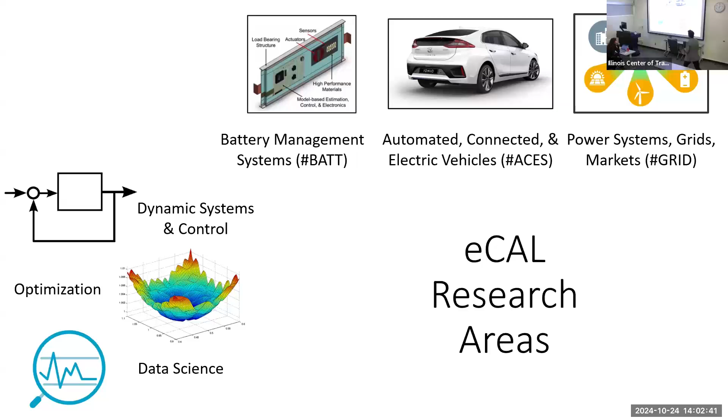I am also faculty director of PATH, which is something like a research center within UC Berkeley's Institute of Transportation Studies, analogous to ICT here. PATH, California Partners for Advanced Transportation Technology - our mission is to realize safe, equitable, efficient, carbon-neutral transportation systems for all through research and development of advanced ideas and technologies.

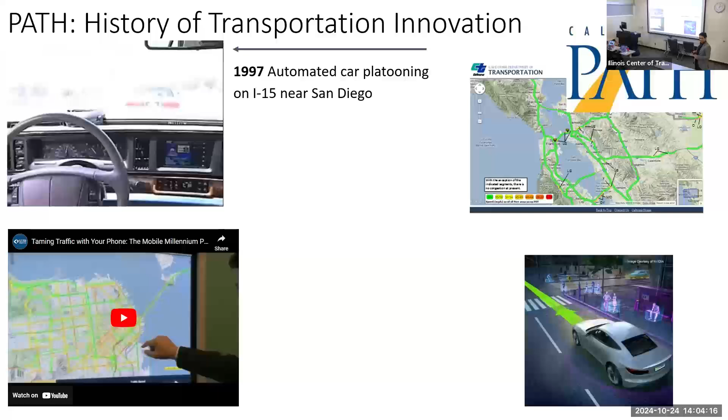To give you a clearer picture, let me say something about our history, our present, and our future. It has quite a history - some of you may be aware, some may not. Let me start with the year 1997. PATH plays an important role in automated vehicles. We were the first to deploy automated vehicles on public roads with this platooning that you see here on I-15 highway just north of San Diego. I should emphasize, the point of this wasn't that the vehicles were intelligent and automated - it was actually the highway. We can have more discussion on that history.

Another piece of history is PATH was the first to create infrastructure-based traffic monitoring with a system called Performance Measurement System, which collects real-time data from 40,000 road sensors. The way we used to monitor traffic was like this: there are many younger people in the audience, but the way we used to monitor traffic is we point a camera at the highway and say 'look, traffic.' The problem was, if we didn't point a camera at the highway, we didn't know what traffic was in that segment, right? Then the next transportation innovation was the helicopter, because then we put a camera in a helicopter, and that helicopter moved around the cities, and you could see where traffic was.

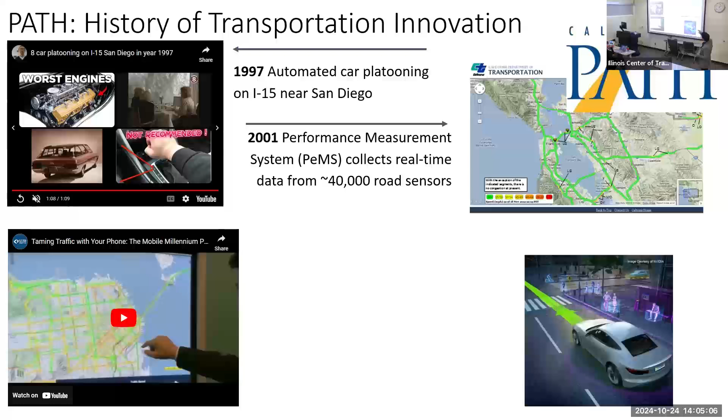So this was infrastructure-based sensing, and it created this online platform where you could get real-time traffic measurement all across California. And then there's Mobile Millennium. The way that most of you probably understand traffic today is with your smartphone, like Google Maps, Apple Maps.

That was actually invented in Path before Google Maps and Apple Maps, with this project called Mobile Millennium, started by Professor Alex Bayen, shown there, where he eventually ended up hiring 100 students to just drive vehicles along the highway. The idea was using cell phones as sensors with the biggest cell phone company at the time—not Apple, there was no iPhone, not Samsung—it was Nokia.

You remember playing Snake? Okay, yeah. You guys look young, but maybe you're not so young if you played Snake on Nokia phones.

After this was done, a year later, Apple hired basically the whole team, and Apple Maps traffic is like Path 2.0 software. Of course, it's evolved since then.

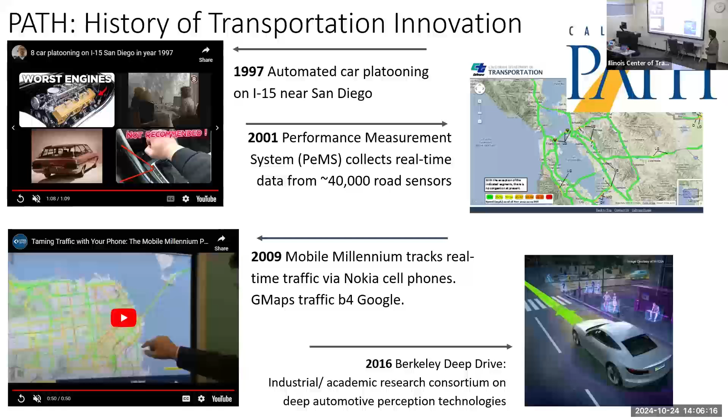More recently, we started this industry consortium—it's been 8 years now—working on computer vision and AI technologies for automated vehicles. Today, here's some of our featured projects. I'll talk about NEXTCAR in this lecture.

MegaVanderTest—this was Alex Bayen and others. Dan Work was a big part of this, a former UIUC faculty member. This was the largest traffic experiment in history to use connected vehicles to suppress stop-and-go waves.

We have a connected vehicle test bed we often work with, and we work with the California Department of Motor Vehicles.

Anyone been to San Francisco and seen these robocars drive around? Yeah? Did you take a ride? You didn't take a ride? Waymo, you tried? Okay, so you tried?

We actually are the only research institute that has a contract to do analysis with the Department of Motor Vehicles, to assess safety and various other things related to rural communities, for freight, and also for disabled and vulnerable populations.

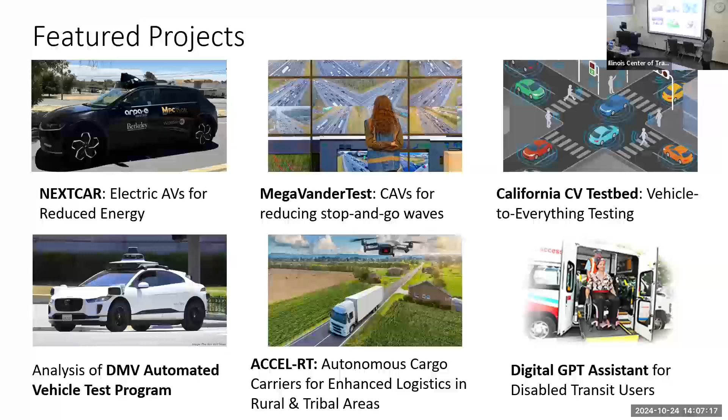When I was driving here, I was listening to a podcast about the scientists involved in the Manhattan Project, talking about trying to figure out the existence of neutrons, because the atomic weight of atoms was more than just the number of protons. Anyways, that's TRL1, right?

And TRL9 is like the iPhone. So Path's role—I'm curious to hear if ICT sees it similarly—faculty and their research labs are basically at TRL 1, 2, 3. When they mature an idea and want to take it to the next stage, that's where you get to TRL 4, 5, 6. Sometimes we call this the valley of death. If it survives and matures, eventually industry picks it up for full deployment and commercialization.

So I see Path's role is to pick up and help mature university research from faculty to the next stages, towards demonstration and deployment. Important to that is partnerships—the P of Path—with government, industry, startups, and academia, because you need that to create these demonstrations and deployments.

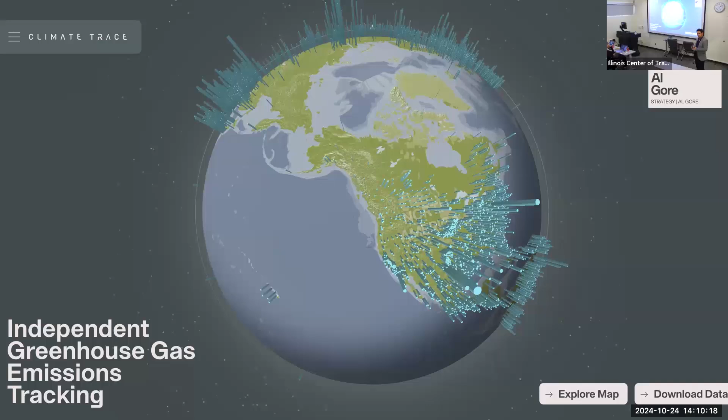Governments would just claim what their carbon emissions were. So finally, he came across this startup that came out of our lab, which got funding from Google to use satellite imagery and AI to basically estimate where carbon emissions come from. And he kind of really helped supercharge it.

So you can get something like this here. What I did is for the world, there's categories. You can break it down in visualizations of carbon emissions in different sectors, like transportation. Here I picked two regions, North America and Asia, sector transportation, and you can see in each of these regions what facilities have the most amount of carbon emissions. So you can check that out if you're ever curious about carbon emissions.

I mentioned these, you know, Waymo and the like in San Francisco. So what happens is these companies are required when they get a testing permit in California to submit crash reports. And so PATH researchers and PhD students do analysis on the safety of these AVs.

So here's a question: are these AVs as safe as human-driven vehicles? How many think those AVs in San Francisco are as safe as human-driven vehicles? Yeah, you have your hand raised. How many think maybe human-driven vehicles are safer? Yeah, okay. Well, anyways, I'm not going to give you a clean answer to this because there really isn't a clean answer. But if you want to know more, you can check out this TRB paper.

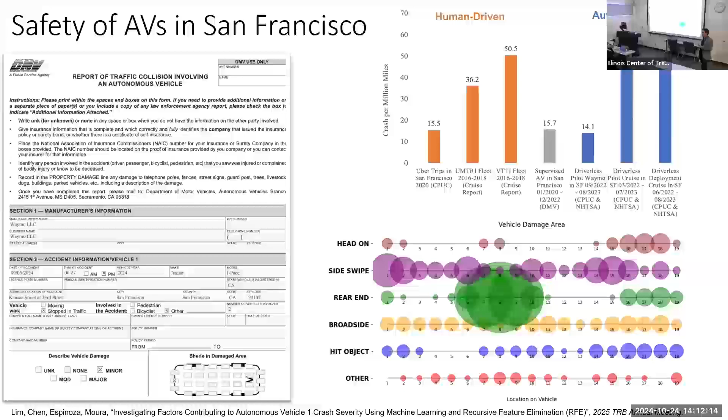It basically does an assessment of these AV vehicles in different stages versus Uber trips driven by humans, of course, also in San Francisco. So we do this sort of analysis, and this visualization shows where vehicles are damaged. Actually, AVs disproportionately compared to human-driven vehicles tend to have more rear-end collisions. So the nature, the distribution of types of crashes you have with AVs are different. You can ask me questions to dive more.

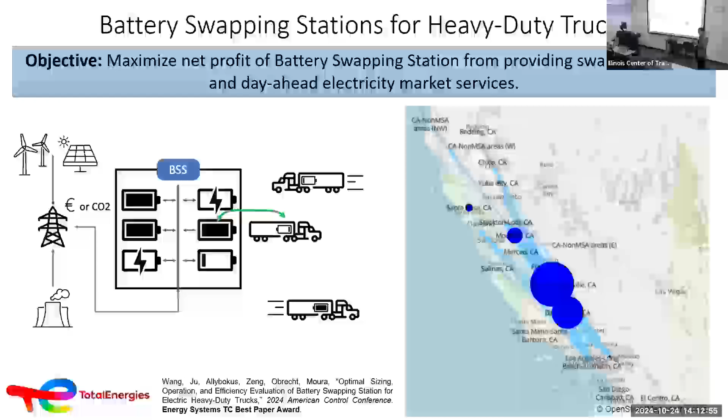Something else we worked on is battery swapping. We want to electrify heavy-duty freight transit, but doing it with these mega chargers might not be the best idea. So here we looked at the idea of swapping batteries in and out for trucks. Meanwhile, these battery swapping stations, when they're waiting for a truck to come take a charged battery, basically serve as battery storage systems providing grid services. So this is an example of when you electrify mobility, the energy and transportation infrastructure are definitively coupled. This facility has two products: e-mobility and power system services.

This is also very connected with the work of Professor Ria Cantu and others, where there was this California project with different UC campuses where we asked this question: in 2035, the plan is to have 100% new vehicle sales in California be zero emission vehicles, largely EVs. But what happens when there's a disaster? How do we evacuate certain areas? Much of this is about vehicle routing problems in cases where transportation links or power lines are down, and how do you robustly evacuate people efficiently, then plan how you might place mobile storage, mobile charging units.

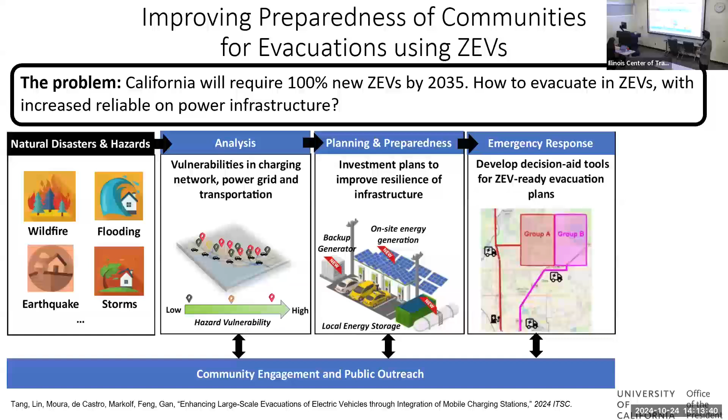Okay, last thing I'll mention is this coupling. We've also done some game theoretic analysis of these bipartite graphs of transportation and power networks. When you electrify, they couple, and we study equilibria of these types of systems. You can ask me questions about that, but I won't say any more about those projects. I want to now dive into the meat of the talk.

So why electrified transportation? Many of you are probably convinced, but I'm going to give you my perspective. If there's one number to give you, here's quiz question number one: how many tons of greenhouse gases are emitted per year on Earth? The answer is 51 billion. So when we think about taking different actions in an effort to bring this to net zero, how big are these slices?

So here we're in this Institute of Transportation. Worldwide, transportation is like 16%. Many of you are doing materials research related to transportation infrastructure. Look at this.

6% from cement, right? Huge opportunity to decarbonize if we can focus on decarbonizing cement, iron, and steel. I won't say any more about that. I'm just saying there's a huge opportunity there.

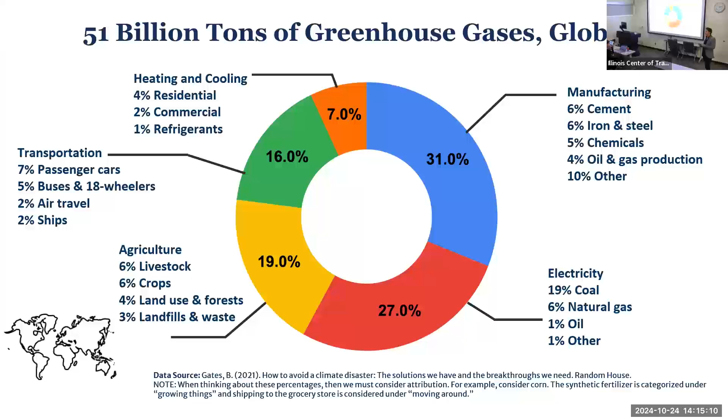Now, this is worldwide, but it's not necessarily representative of more developed economies. This is the entire world. Let me focus on California, since I'm here. California is an example of, like, if it were its own country, it'd be the 4th or 5th largest economy in the world. Anyways, California emits 0.42 billion tons of greenhouse gases. Almost 1% of the whole world's greenhouse gases are because of these Californians.

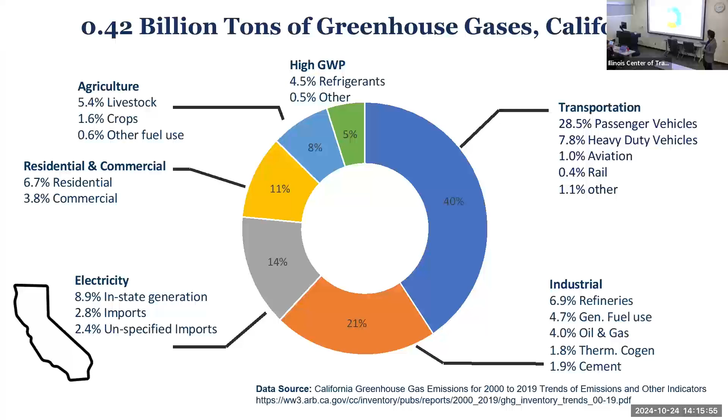Damn Californians. So anyways, but the nature of California's economy, and it's very similar in developed economies, transportation is by far the biggest sector, 40%. So a lot of policies in California are very focused on decarbonizing transportation because that's a huge chunk, right? And meanwhile, once you electrify transportation, you also have to decarbonize electricity, and that's also happening.

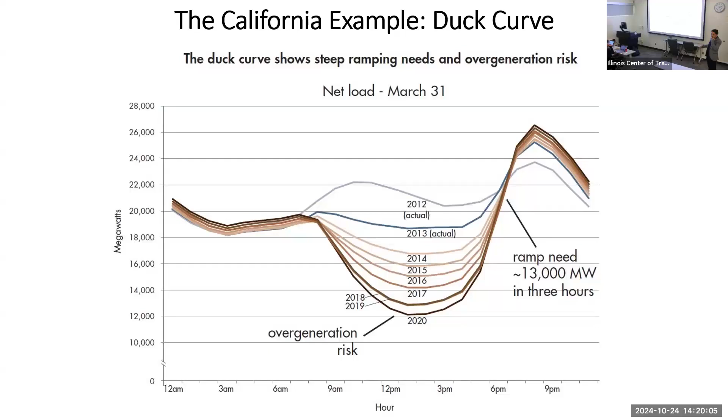Now, that was in 2012, projecting to 2020. The year is 2024 right now, right? So what happened? Here's what happened.

So in spring, this is actual data from California. You got total demand with this light blue curve, and then this dark blue or purplish is net demand. So you can see the duck curve happened, it's kind of this big valley. And the ramping here, I picked a date in April this year, 16,000 megawatts in 3 hours.

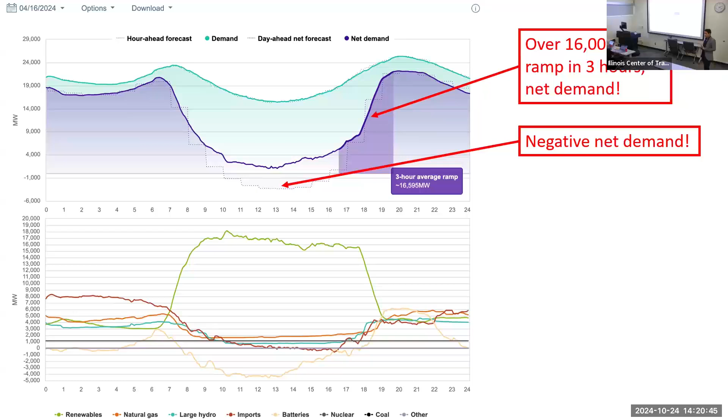It's happening, this rapid ramping. In fact, there's even negative demand, which means, at least in California, in spring especially, we're generating more electricity from renewables, particularly, than we can even consume. We're over-generating, okay?

And that's demonstrated because this green curve, it's a little hard to read, but this is renewable generation. You can see it looks like someone took a knife and sliced the top of it, right? Normally you would have this type of shape, because we have to actually reduce output from solar because we have nowhere to put it, right? We're trying to export it. Meanwhile, California is deploying all these batteries, and that's what this light yellow curve is, and they're trying to charge them up in the middle of the day, okay?

By the way, I haven't been talking about transportation in the past couple slides. So you can kind of see, okay, now there's this opportunity where maybe we can take all this excess supply and use it for other purposes, including transportation.

There's this other problem, right? If we want to electrify vehicles, people tend to arrive home in the evening and plug in and charge, which actually makes this ramping problem worse. It'll increase demand and then it just worsens the problem.

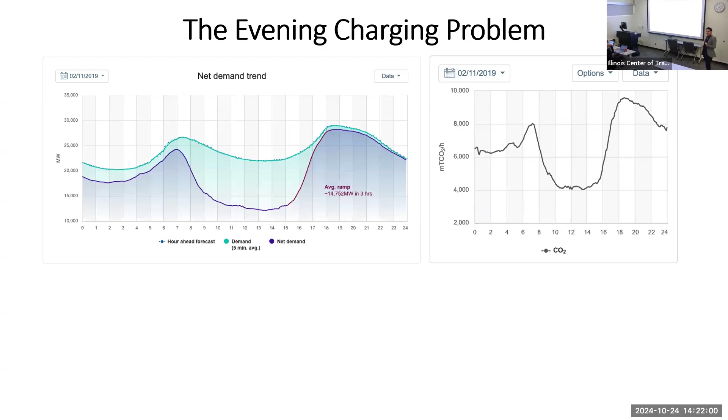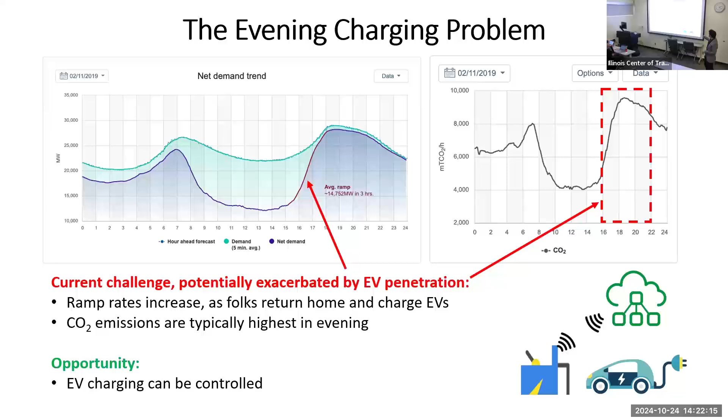Also, if it's charging overnight, this is the time of day where emissions are the worst. So if you come to California and rent a car, please don't charge in the evening, because that's when emissions are the worst. If you have a chance, try to do it in the middle of the day. So obviously there's an opportunity where can we control EV charging, shift it to these times away, so it doesn't exacerbate this ramping problem, and minimize the marginal carbon emissions.

Here's actually what I want people to do. And by the way, this is kind of California specific. I want you to leave home with 30%.

Did anyone leave their home this morning with 30% charge in their phone? No? Yeah? Yes, Laura, thank you. Yeah, you can charge at your desk, right? Yeah, okay good, you can live in California.

So that's perfect, because that's when carbon emissions are least, and if you have an opportunity to charge in the middle of the day, you can return home with 90%. You don't have to worry about charging in the middle of the night. And by the way, that addresses inequities where people might not be able to charge at home if they don't have a place to park.

So okay, now that's all of the context which I want to use to describe this project, SlrpEV, about improving public and workplace charging, because we don't have sufficient public and workplace charging. So the goal here is to create the next generation of workplace or public EV charging that achieves these goals. What I want to emphasize is this is a deployment where we built an EV charging station, and there's many smart EV charging stations that optimize power delivery.

So why is this different? This is different because we're not just optimizing the charging schedule, the power, but we're optimizing the price that we offer people, and we show people a menu of prices with different options. And so really, this is about putting the human in the loop with machine learning to understand their behavior, as you'll see. So I like to think about this as a cyber-physical human system.

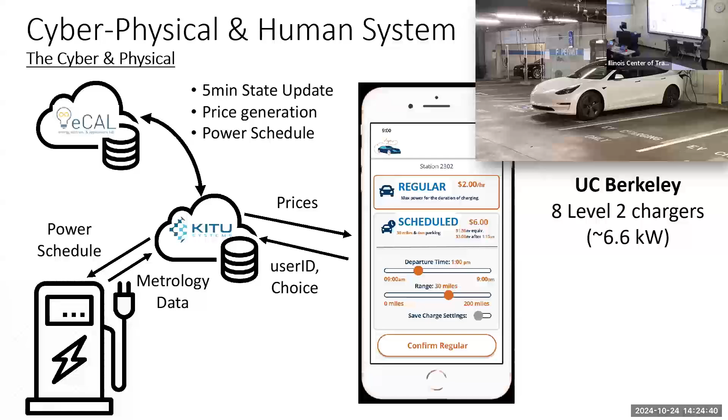So you pull up, you scan a QR code, and then there's an app or a web app. You log in, and then you get prices. Don't worry about the prices and options yet, I'll explain that. You consider these options, and then you pick your choice. That choice goes in, and then there's some optimization happening, and it sends a power schedule back down to the chargers. Then there's the so-called metrology data, every 5 minutes we get an update from the chargers of how much power it's delivering, whether someone's connected, yada yada. So that's the cyber part.

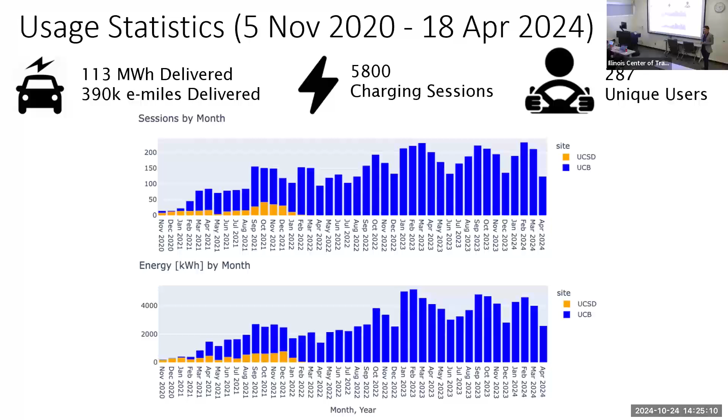Now the human part I'll describe in a moment, but first, some usage statistics over this period: energy, charging sessions, unique users. Here I'm showing the energy and sessions by month. Actually, what I want to emphasize is the most important metric, I think, is the number of unique users, because then we get unique behaviors of how people arrive and depart, the energy they need, and the choices they make. So I think that's the most valuable metric, getting a lot of different unique users and different behaviors. And there's seasonality that we find.

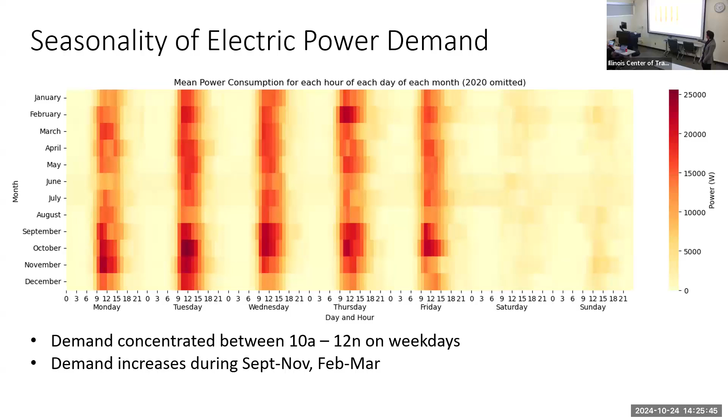So people use this as commuters, basically. Here's a nice visualization where you have day and hour on the x-axis. Monday, Tuesday, Wednesday, Saturday, Sunday, there isn't much usage. And then we have month, so you can see the seasonality. Basically you see people use this as workplace charging - Monday, Tuesday, Wednesday, Thursday, Friday. And if you look a little closely, it's a little lighter in summer because there's less activity on campus, and it's kind of heavier at the beginning of our terms.

So now the human part, which is really the key unique thing about this research. It's really about providing choices, discrete choices - there's discrete choice theory underneath this. So let me describe the two choices we offer our users. The first is called regular, and this is your normal charging experience with a phone or a laptop. You plug in and it charges immediately at full power until you top off the battery or you unplug. In regular, we consider it not controllable, like we can't change the power delivery.

The more interesting one is scheduled. With scheduled, we ask them what time do you plan to depart and how much added range you need, how much energy do you need. This provides constraints in an optimization where we know, okay, they plugged in, we need to deliver to them this much energy by this deadline, but the trajectory of the power delivery is otherwise flexible. And so this is now controllable. So the research question is, if I want to shift load, how much do I discount scheduled to acquire this flexibility?

By the way, this is not strange or different, because when you shop on Amazon, you experience this. You get shipping options, right? There's next day shipping at normal price, and then there's like the Amazon delivery day, where it's discounted - you give up some quality of service, if you don't mind, and you get a cheaper shipping price, but they're optimizing logistics on their back end. So we're like the Amazon of EV charging here.

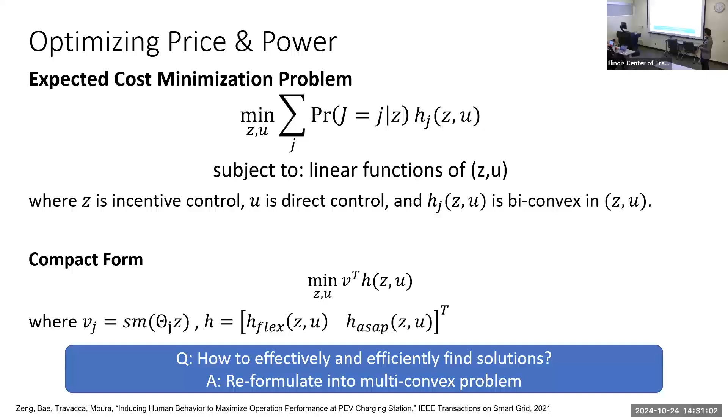So you can refer to this paper to see some of the mathematical details. So, in the end, here's what you get. We optimize price, and here's the result.

So basically, we just want to avoid EV charging here. Meanwhile, if people arrive early in the morning, if we can delay their charging just a little bit, maybe we can dump them into the lowest cost period. You can start to see what's going on.

Yeah? So it's sort of like an aggressive American restaurant where the waiter says, get you fed, get your check, get paid, get you out of there. Right? So that's what we want with EV charging stations, usually to increase utilization, because when we pump out kilowatt hours, then we can make revenue to recover the capital cost.

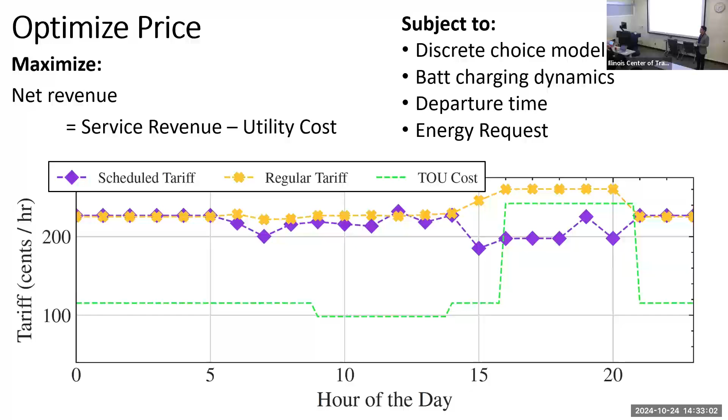That's kind of the intuition of what all the mathematics and learning is producing. And in the end, we get this: comparing to a baseline of $1.50 per hour versus optimizing the price and the power. This is only optimizing the power, with a fixed price to users. We can actually increase the net revenue by almost 50%, which is a combination of reducing the operating costs.

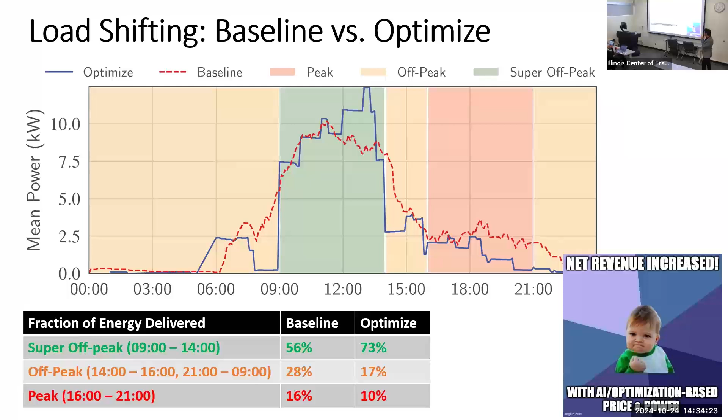But we also learn from data on user behavior that we can charge a slightly higher price and people will still use the service. So we're also learning what people's threshold is for paying for charging. Here you can see the different price periods: we want to charge in the super off-peak and avoid the peak. Here's the mean power over a period at SlrpEV - just before this green period, when it's optimized, we basically bring power almost to zero, because we're delaying those users and shifting them into this period. This happens all dynamically, by learning user behavior and optimizing with respect to the utility tariffs. This was me - I thought this actually worked in practice, which shocked me. I thought people would not be sensitive to small variations in price, but they actually were. So that's pretty cool.

All right, let me move on to NEXTCAR, and we're going to talk about automated and connected vehicles.

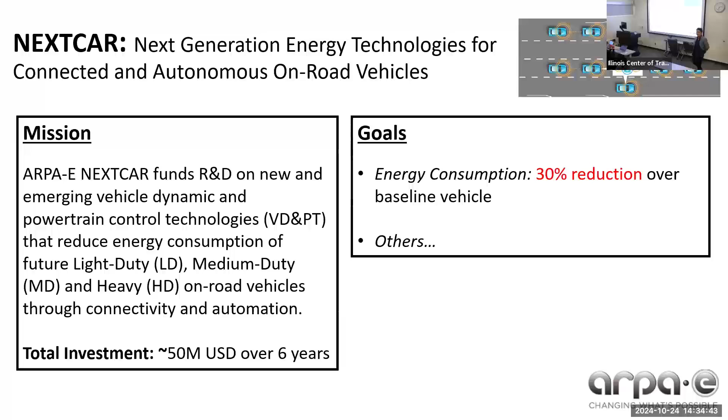This NEXTCAR project, sponsored by the DOE, has the goal of reducing energy consumption in vehicles by 30% by leveraging connectivity and autonomy. This is collaborative between my lab, Francesco Borrelli's MPC lab, and a startup that spun out called WideSense. These are our vehicles that we use for the platform. We're actually in the 7th year of this project - I really want it to end, to be honest.

Most of our experiments were done with this car on the left. Now, one way to reduce vehicle consumption by 30% with connectivity and autonomy is to start with a baseline vehicle that's already very inefficient, right? In 2017, if you went to the EPA website, downloaded all the vehicles, and sorted by highest to lowest fuel economy, do you know what the number one best vehicle was? It was this one - we literally picked the hardest car you can buy in America. It wasn't on purpose; it's because we had a strong partnership with Hyundai. But yeah, we realized later, okay, we made it pretty hard for ourselves. Of course, the people at DOE were like, good, Scott, good. So they liked that.

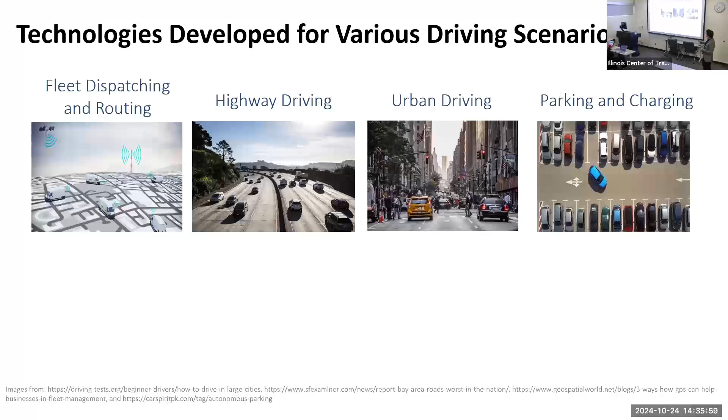Then we moved to a full battery electric, the Ioniq 5. We developed several different technologies: fleet dispatching, highway driving, urban driving, parking, and charging. I'm only going to talk about urban driving, specifically eco-driving through signalized intersections with AI-enabled motion planning and control. Here's the key idea - eco-driving refers to connectivity between the traffic signals and the cars, specifically a traffic controller that knows the signal phase and timing - whether it's red, green, or yellow, and how much longer it will remain so - and wirelessly transmits that to the vehicle, which then optimizes its speed trajectory.

Now, this is not rocket science if you want to minimize energy. Do you know what the optimal solution is for the speed profile if you want to minimize energy?

I was going to say ride your bike. Yeah, even better answer - he said stay home. I like that better. Good. Okay, we all have the same sense of humor here, so that's nice.

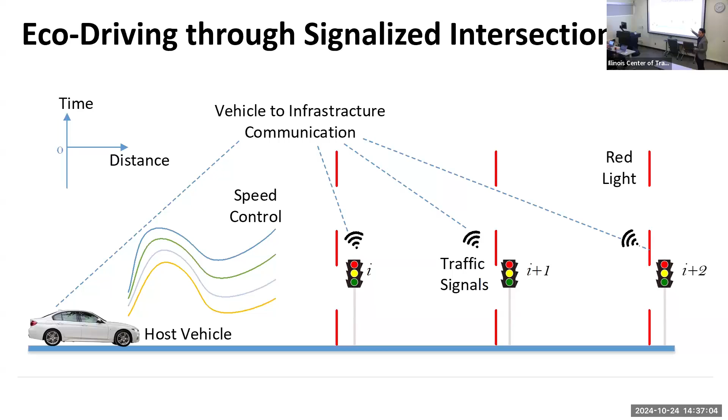Okay, but if you need to go from A to B under a time constraint - because if there's no time constraint, you just don't move, or you go at constant speed - the problem is that you have these red lights. So if you can get this information, it's very helpful. Just to motivate the problem, here's a simple example.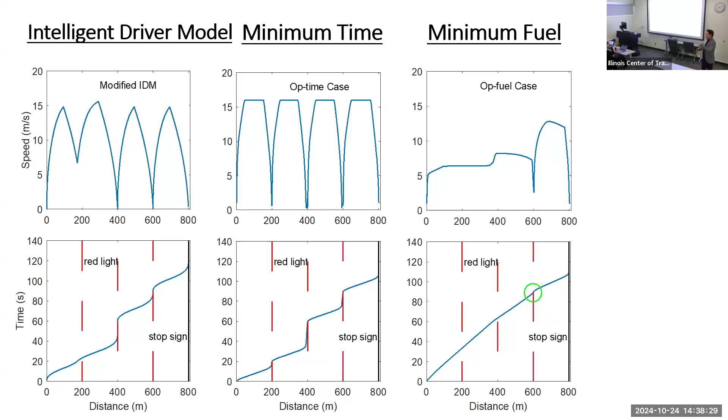Why does it make you nervous? You're driving, so if I'm driving the car and you're in the passenger seat, you're going full speed and it's still red, right? And it's not slowing down. Even though you're seeing red, you anticipate, okay, I should come to a stop. Because here it deterministically knows it's going to turn green the moment I arrive. Okay, but this feels risky, no?

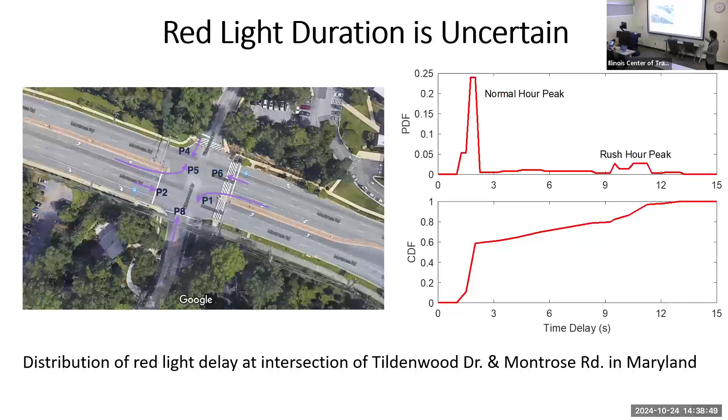Yeah, okay, so not robust to this uncertainty. So we worked a lot on this. We gathered data on traffic signal timing, made probability distributions. This was interesting, it was bimodal in this intersection. Rush hour had this second mode, which is a longer delay.

And then we actually deployed it, or demonstrated it. So here's what it looks like. This was like almost 7 years ago, so this is kind of an old video. I'll show you newer ones in a sec.

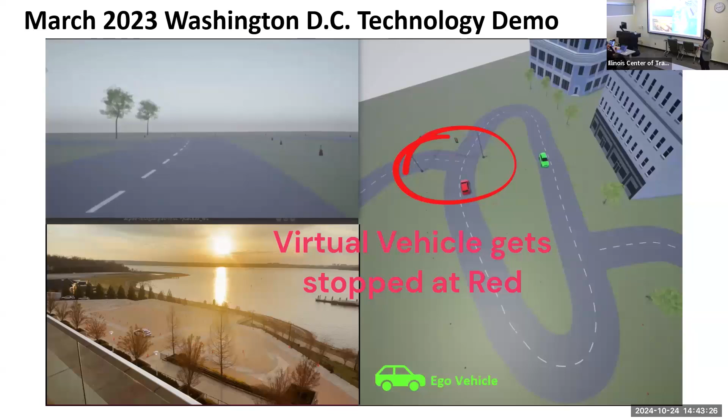And then we made a virtual environment, and then we had our NPC vehicle in red, and the virtual traffic light. And what's being showcased here is the ego vehicle communicating with this virtual traffic light. And the other thing that'll occur is you'll see it's also doing automated lane change for the purpose of reducing energy consumption. So if it determines that it would be best to do a lane change to go around this NPC to reduce energy consumption, it'll go ahead and do that. I think that shows as this plays.

So, for highway and for trucks, there's been a lot of work at PATH doing this, some mixed results. And here we try to explore what is the possibility to do this on arterial roads with light duty vehicles. So I want to give a lot of time for questions if we have.

Okay, key things. Transportation produces 40% greenhouse gas emissions in developed economies like California. Next generation charging stations, we need to use human behavior, and AI is a very nice tool, machine learning, to understand human behavior, so we can really optimize power and price, so we can make workplace charging economically feasible, because it's not really economically feasible today. And then I also talked about how connectivity and automation, I think primarily the purpose is safety, honestly, but also there's a secondary purpose that can focus on reducing energy that we focused on. And if you find any of this interesting or find opportunities where we can do something together, please reach out to me so we can collaborate on reducing transportation CO2 and just create really creative, exciting innovations in mobility.

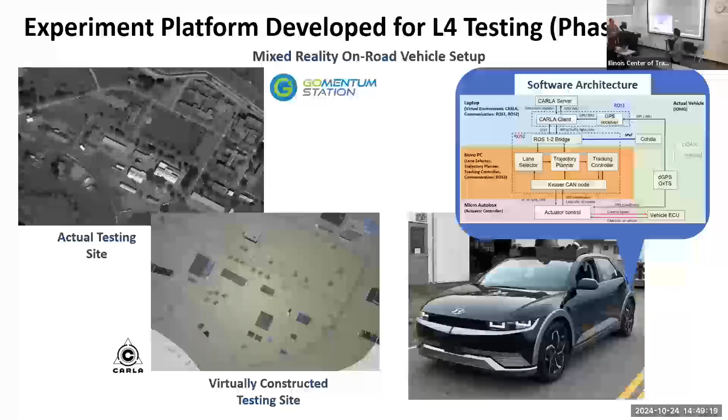Yeah, the quick answer is when they pick schedule, if I were to redo this, I would do it a little different. But if they pick scheduled, when they indicate the departure time of 1 p.m., if they stay after, then the price increases. We call this overstay price. Tesla, for example, gives it an idle time. We get them to commit ahead of time, right? Of when they plan to leave and they stay after, then the price increases a lot.

So that works. Also, charging per hour is a big deal because you're not just providing electrons, you're letting them rent atoms in space. And there's a value to that service, right? Because I think largely people want to park. And secondarily, if they can get a charge, that's great. So you actually have to consider both of those.

That's a really quick question. Sorry, it's really quick.

I want to add to earlier questions regarding the choices of people. I felt like actually, I wonder if this is at work, right? Essentially, people do have a choice of not charge at all. Right. Then that's actually a big indicator of their behavior. And also, you actually only observe those people who do choose to charge. Yes. These people may do not care about money as much as those people who choose not to charge because they don't. Yes. Right? So I was wondering if maybe that's something that can be addressed also in maybe a follow-up study that you're carrying out.

Yeah, Professor Yang, as usual, you've put your finger on one of the most difficult, important issues that I didn't address. So there's actually 3 choices: regular, scheduled, or don't charge. And so you also have to consider, and you want to measure how many times someone decides, I don't want to charge, but we can't observe that.

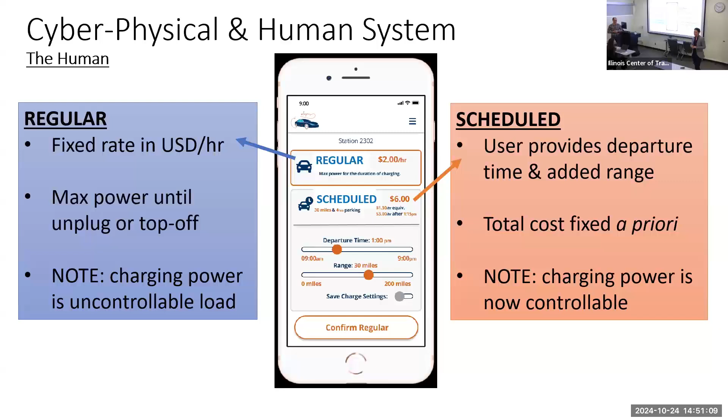Time's up, so I'm going to leave that there. But I can tell you, yeah, that's difficult. Afterwards, if you want to know, I can tell you.

Thank you so much, Professor Moura.